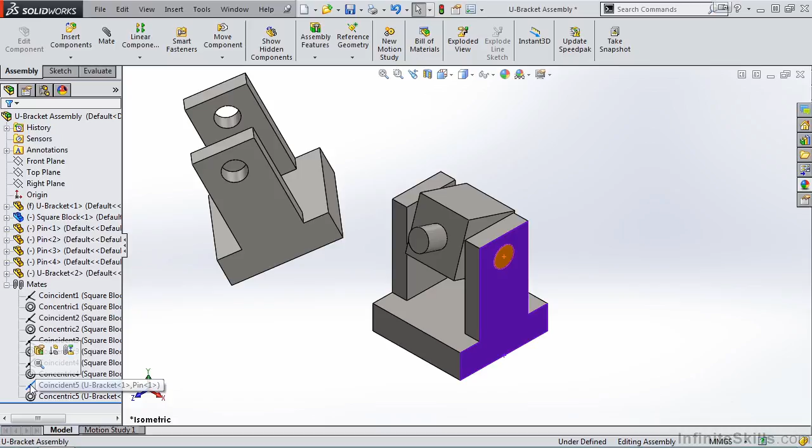The coincident mate is mating the face of the pin and the face of the U-bracket. Let's suppress the coincident mate. Once we suppress the coincident mate, the one mate we have remaining is the concentric mate. So if I move the square block, notice we maintain the concentric mate. However, the coincident mate is suppressed.

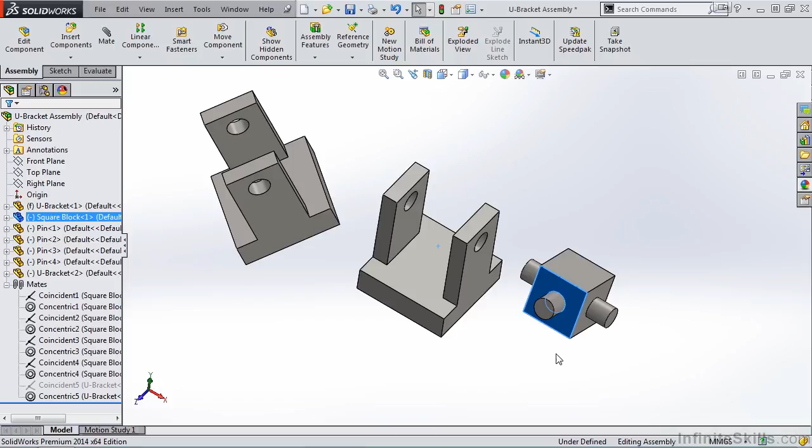Now let's take a look at how to add a width mate. The width mate will allow this square block to stay centered within the legs of the U-bracket. So let's go back into the mate command, and I am going to clear this window. I will scroll down, select advanced mates, and then select the width mate. And you will see we have two windows, the width selections and the tab selections. And you will select two faces for both windows.

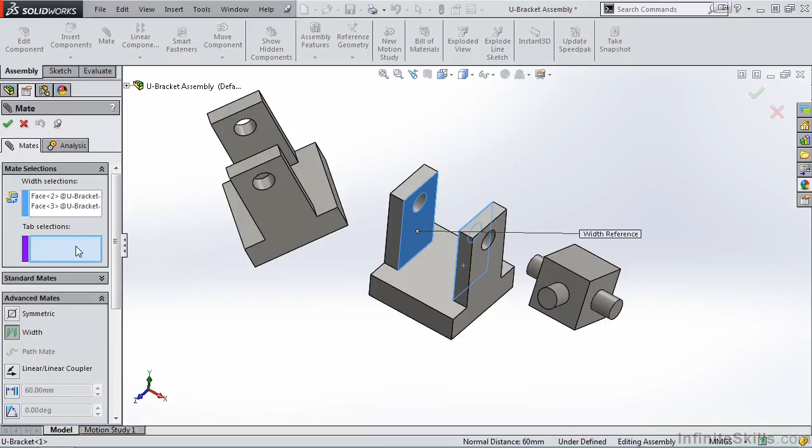So for the width selections, I am going to select the inside faces of the bracket. For the tab selections, I'm going to select the two faces of the square block. And now that square block is centered within the two legs of the U-bracket. So if the size of the U-bracket expands or something changes on the block, that block will always be centered within the legs of the U-bracket. So let's go ahead and accept it.

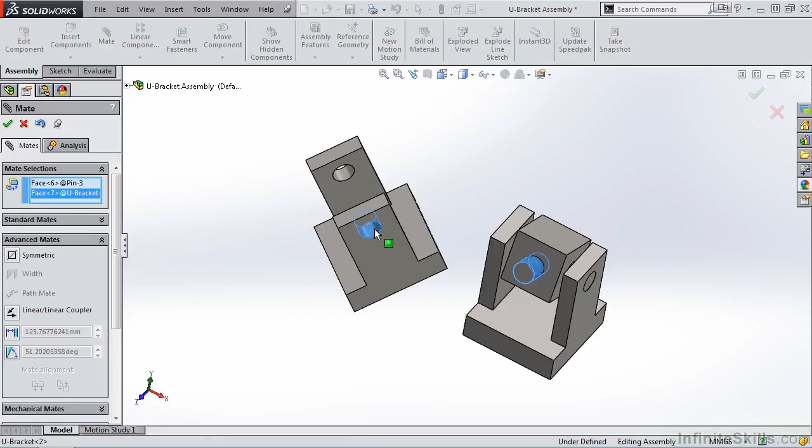And now let's do the same for this upper U-bracket. First, we'll apply a concentric mate. That falls under standard mates. And let's go ahead and flip it. There we go. And now we are ready for the advanced mate, which is the width mate.

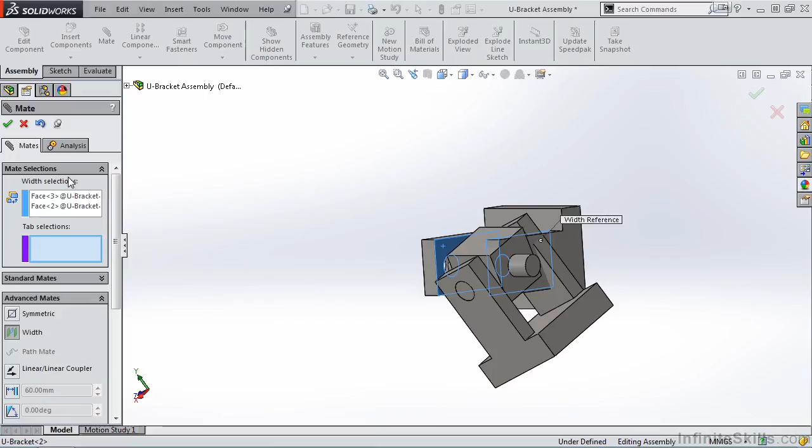And once again, I am going to select the two faces of the U-bracket for the width selection. And then for the tab, I'm going to select the two faces of the square block. I will select the green check mark, close out of the mate property manager, and notice the U-bracket is centered around the square block.

Once again, we have a lot of assemblies that require this application. So the width mate, while it's easy to use, is considered an advanced mate, but it's one of those mates that you should know how to use even in an introductory course.